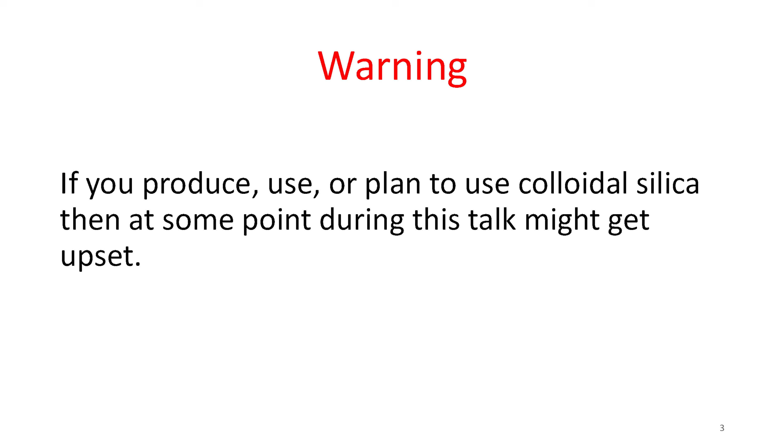And then he says it: 'If you produce, use, or plan to use colloidal silica, then at some point during this talk, you might get upset.' So how is that not a target? That's a target, and I don't like targets.

I know Tyler has a lot of fans, a lot of followers, but at a professional level, this is incorrect to put out there into the market. I have never seen him do this to any other products - I haven't seen him do it to CarbonCure, I hadn't seen him do it to sodium silicates or anything else he studies. Anything but us. But yet, CarbonCure gets hit with nanotubes.

Because E5 has a loud voice, and we're not afraid to throw our stuff out there. That's fine, I'm okay to take a target, but guess what - so you might get upset? Make sure your stuff's right before you start doing this. Because if I find it, and I dig long enough and find something that's not right, I'm going to expose it, and I will expose it very loudly.

This is playing games. We don't need showmanship in concrete. We need solutions because we're hemorrhaging in the world right now, with concrete finishers losing their rear ends because of decisions being made at the high end level. They're losing their butts every day, out there spinning their wheels. This is not a joking matter. When I see documents like this being thrown out there, it's not time to joke around. It's people's livelihood you're messing with. Quit messing with it.

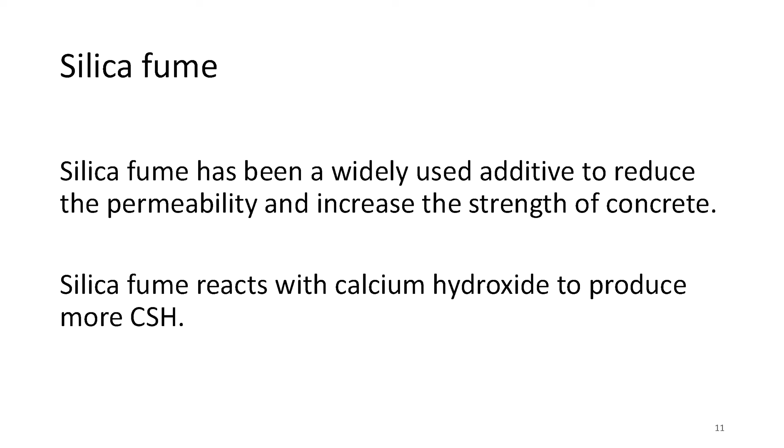Slide 9, he goes, what is colloidal silica? Slide 10, same thing. Then he gets into silica fume. Yes, silica fume has been widely used as an additive for reducing permeability and increasing strength in concrete. We all know this, it's been around forever. It's very problematic, very water thirsty. But he's just setting the tone, and he's right on these slides, it's basic knowledge. Go back to slide 12.

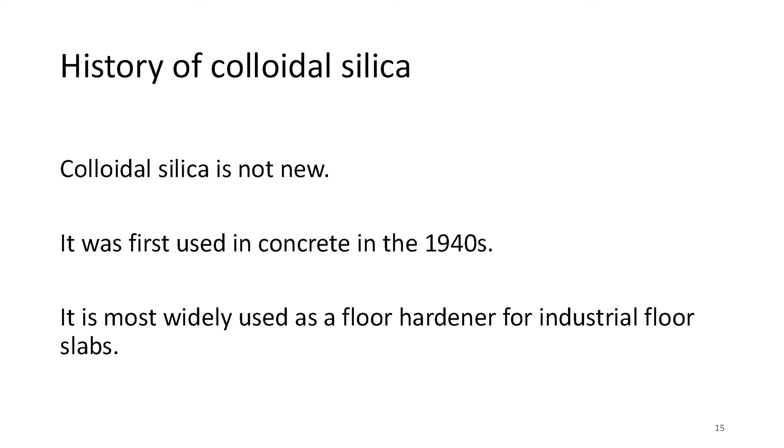From slide 12 down to slide 16, he's right, this is the history of what's going on. But back up, slide 15 though, it's not right. Colloidal silica is not new, but colloidal silica the way E5 is using it is new. Because what they did back in those days did not work very well. We had to modify and do some other manufacturing pieces to get this stuff to work in concrete, to survive the 5 stages of hydration.

In the 40s it wasn't introduced into concrete as a blanket statement, it was more so mortar mixes, back in the 40s, Army Corps paper work. But then you get into the 50s, 60s, 70s, Army Corps of Engineers work. Halliburton started using it in oil fracking, and then they started using it in grout mixes. But we have to ask, why was it being used in oil fracking? Well, because of less cracking in their grout. They figured that out, less shrinkage.

Moisture hydration, yeah. They were doing processes that were very critical when doing oil fracking, so they depended on nanoparticles to get them through some very tough situations. So it's not that it didn't work in the cement grout, it worked. But no one could get it to work through the 5 stages of hydration of concrete, or in a ready-mix truck. That was the challenge, so I get it.

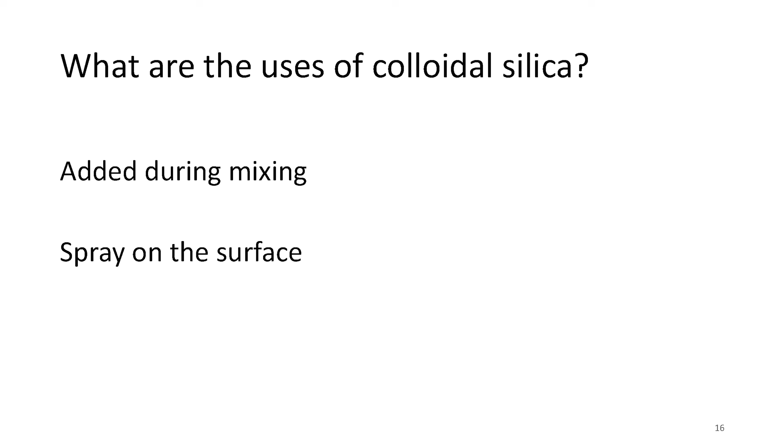Slide 16, what are the uses? He talks about all that, I get all this, it's all rhetorical. He goes, what would you use colloidal silica for? Well, reduce permeability, increase strength and hardness. This is where I stop. I do not preach that it increases strength. It does increase hardness, but it does not increase strength. Strength and hardness are two different things, okay?

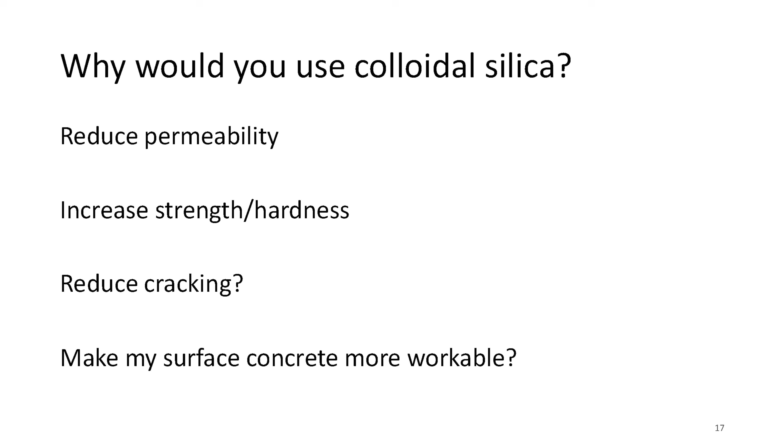Reduce cracking? Make surface concrete more workable? Really, so he's questioning all these things. He's got the right to question. Great, what would you do if this is true? Reduce my curing requirements, reduce cement, extend service life, blah blah blah.

E5 was used in over 300 plus bridges, probably more like 400, just in the state of Indiana alone. And out of those 400, only several have been in question, and a lot of those were 1L overlays anyway that were wet cured, not plastic sheet cured.

Now we can go through the long list of the sprinkle effect, keeping concrete wet, keeping the blankets wet, that happens, X, Y, and Z. But only one piece of the recipe might be strong, while the rest of the recipe might be faulty. That one piece can't make up for the faulty recipe.

Okay, so, but we're an easy target, easy to blame. And that's okay, I'm okay to take that up.

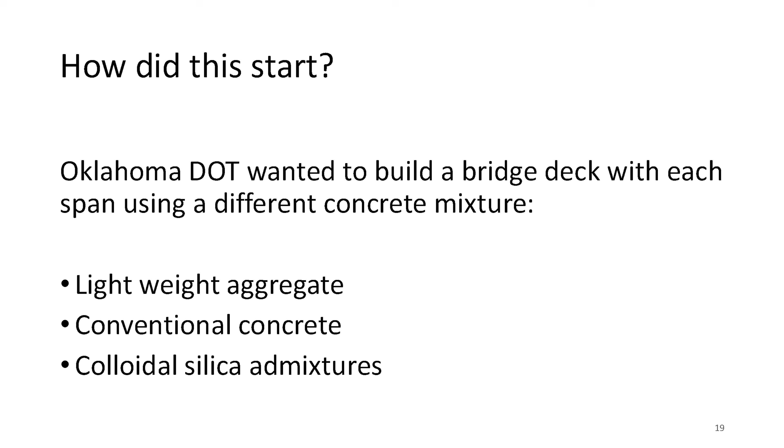So now he talks about, in slide 19, how did it start. Oklahoma DOT wanted to build a bridge deck with each span using lightweight and conventional concrete and colloidal silica admixtures. So as he's going through here, Oklahoma State wanted to develop concrete mixtures and benefit of these materials.

So it's my understanding that the university, Dr. Tyler Ley and the students came up with these mix designs. I've seen the mixed designs, I looked at them. I already knew they were over-chemicalized and not something I would be putting on a bridge. But hey, I'm not the expert. You wanted to do this, you do it, I'll stay out of it.

My job is to make sure on the day of pour, game day, that everybody's doing game day preparation best practices, everything's met, everything's done, best finishing.

So when we get into this, the products are, slide 22, what colloidal silica products were used. He uses A1, A2, B, and C.

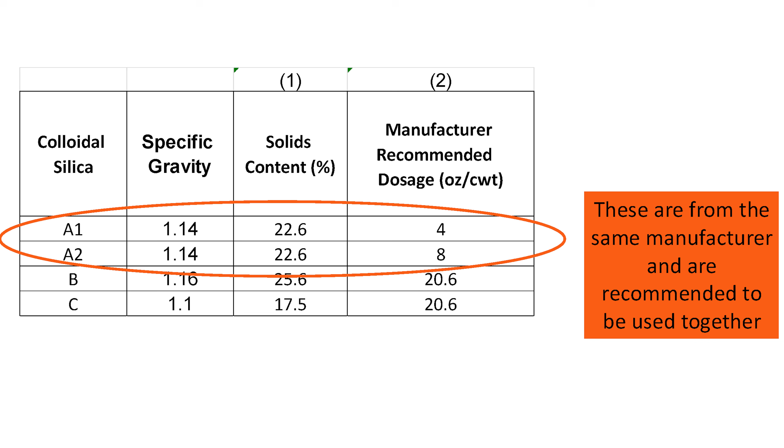One thing about these, the most ingredients, he talks about the most and least active ingredients within this table. I already know that this table's wrong when I look at the solids content. I already know that these solid contents can't be off this much, and that's because most manufacturers run with very strict quality control measures and how close they are in manufacturing. So these are way off according to the C of A's on products delivered.

And when you look at slide number, let's go to slide number 33, just get to the discussion. At the manufacturer's recommended dosage, yes, those were manufacturer recommended dosage of each product. That I do agree with.

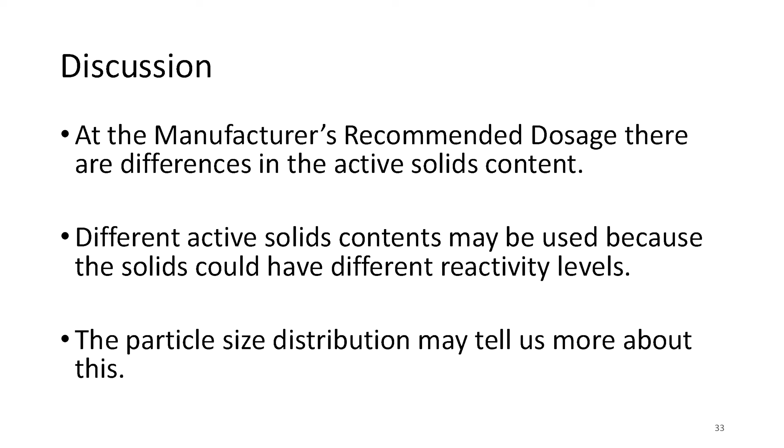The particle size distribution is something that is a very delicate process to use, and you have to use certain tools and equipment to get the actual measurement, because we are measuring particles that are 100,000 times smaller than the circumference of your hair. So I know what it takes to figure these out.

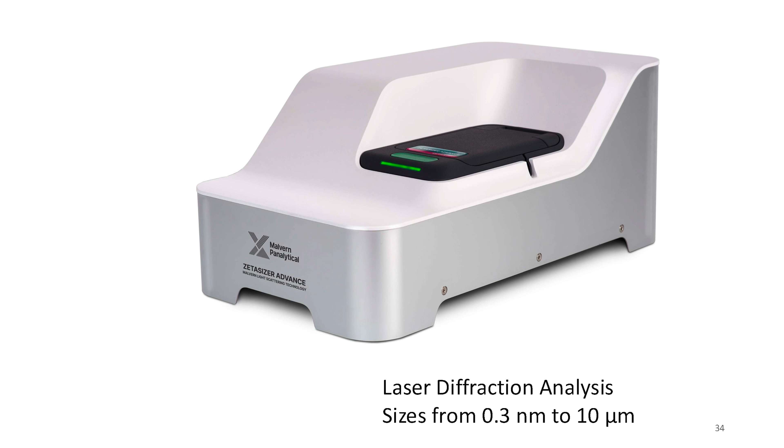So when we go to slide 34, I see the picture of the laser diffraction, and I already know this is wrong. Laser diffraction is not a way to measure nanoparticles to their precise size. What laser diffraction will catch is agglomerations. They'll show chicken necks or turkey necks in between the particles, and then they'll consider that one particle, which we know through federal court cases is not the proper way to measure.

Yeah, we've already been through that, and the courts have already ruled that the best way to do it is the BET method, where you've literally got to dry it, break it down to each particle, and then measure. This is incorrect, so therefore the message in the particle distribution is an inferior way to test the product that is in question throughout this whole presentation and through the bridge deck. Obviously, you know more about this than I, but this machine goes to sub 100 nanometers?

This is just a quick and dirty test a lot of people run, but it's not correct. It doesn't tell you the whole story about what's going on. So when you go to slide 37, I knew it was instantly wrong when I start seeing the D50 nanometer at 50, 125, 267, 37. I know that product A is not 50 nanometers.

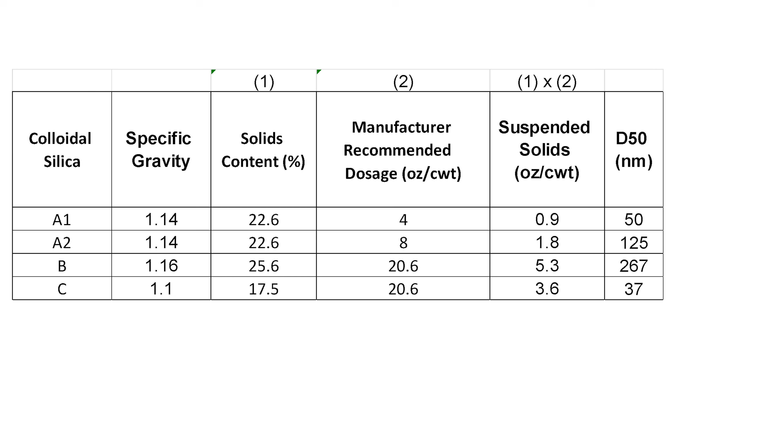I know product A2 is not 125 nanometers. I know product B is not 267. I know product C is not. Even though those aren't mine, I know what they are - it's interesting how I found out. Either way, this is not correct. That information's wrong. It's not even close to silica fume.

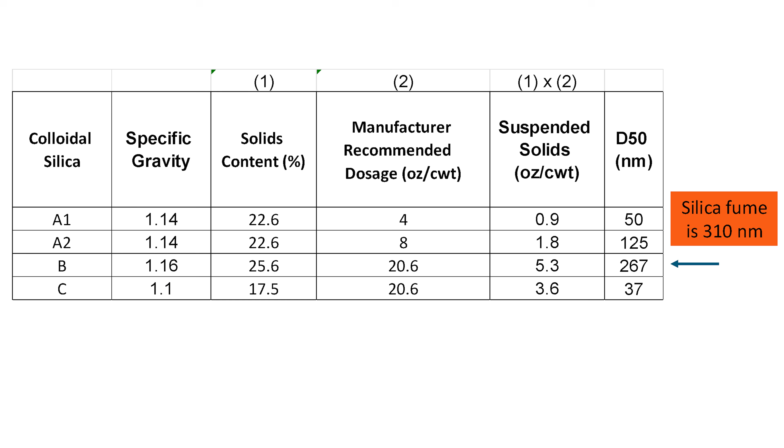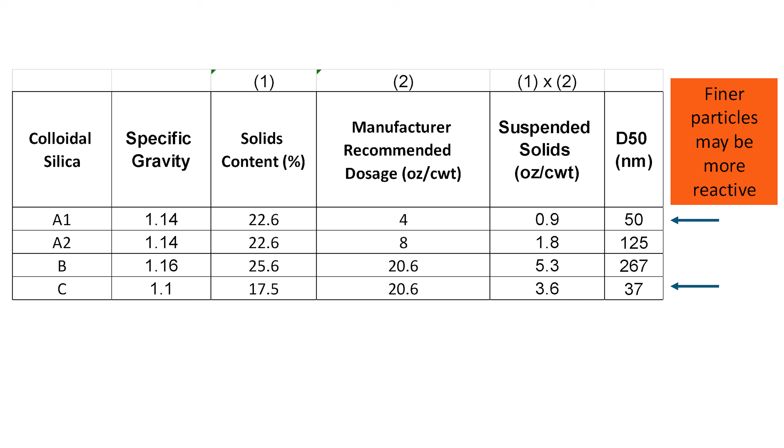On slide 38, and then slide 39, it talks about finer particles may be more reactive. Well, that statement is true, but 50 nanometers is not as reactive as something that is 3 to 9. This is not correct at all. This whole information contradicts his research right off the bat, so it already puts a trust factor for me when I see this.

No, you ain't doing this testing. This is not right. If the fundamental numbers or quality of the product is off, then how can anything following that be accurate? So when you go to slide 42, we talk about the wrong instrument - laser diffraction cannot see a 9 nanometer colloid. You just can't see it, it's too small.

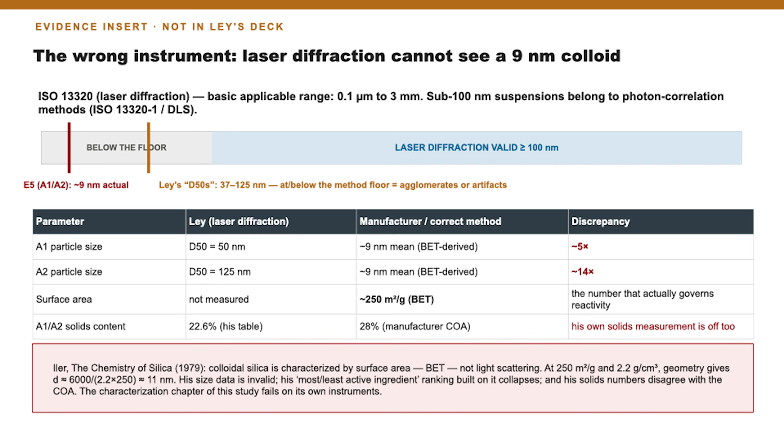Okay, so this graph kind of shows what it was. I know what the manufacturing is. I know what the square footage is. So here they are, I know what it is. So all that information is incorrect.

Now let's get into the bridge mix, the 0.45 water cement ratio. There was no fly ash for this particular pour. This is just a 6.5 sack - pretty general mix, right? Pretty general.

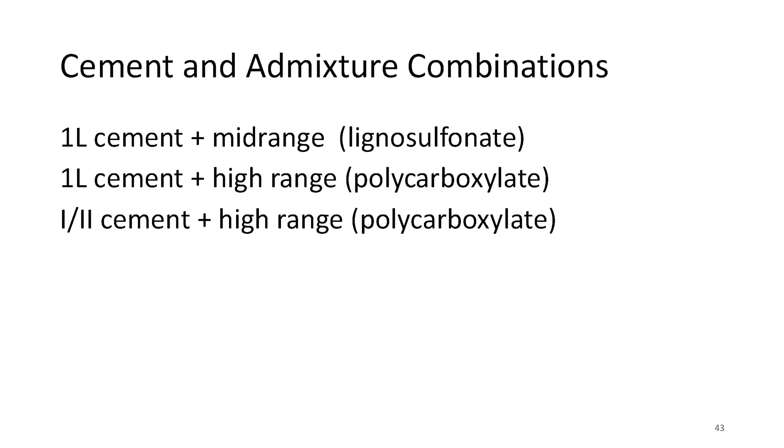And then on slide 41, 3 cements, water reducer systems. So now he's testing all these water, lignin, sulfonates, polys, blah blah, through the testing. He does slump, water cement ratio, compressive strength, resistivity, shrinkage tests, and diffusion of coefficient.

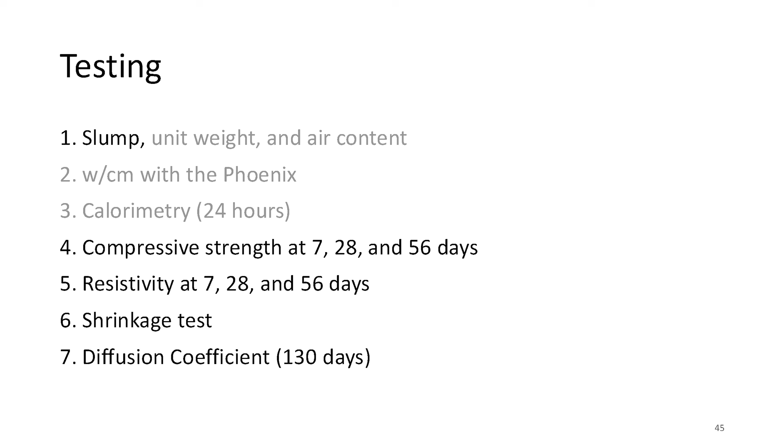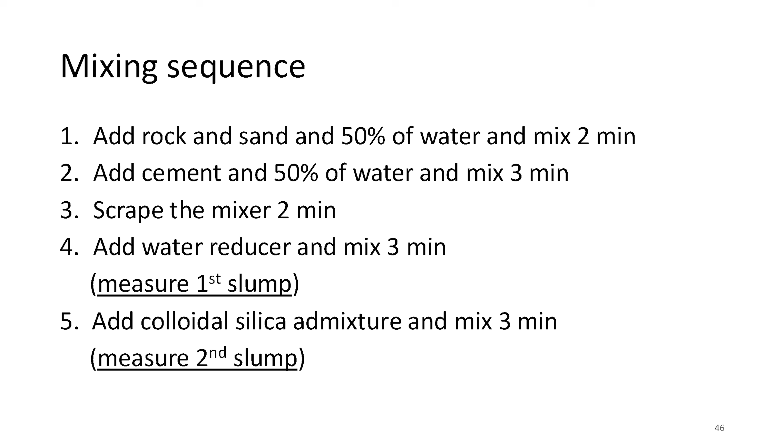That's on slide 45. When you go to slide 46, he starts talking about the mixing sequence - adding rock and sand, 50% of the water, mix 2 minutes, add cement, scrape the mixer, add the water reducer 3 minutes, add the colloidal silica admixture, mix 3 more minutes, measure the second slump. I don't know what dosing process this is, but I can tell you right now, this is not the way to mix colloidal silica in a mix, period.

First of all, you got to get 70, 80% of the water up front. You cannot do 50%. You still got too much dry material - it doesn't have enough surface chemistry on it to wet it out. So therefore something's going to happen, it's not going to perform correctly. I already seen that as like, well, this is wrong.

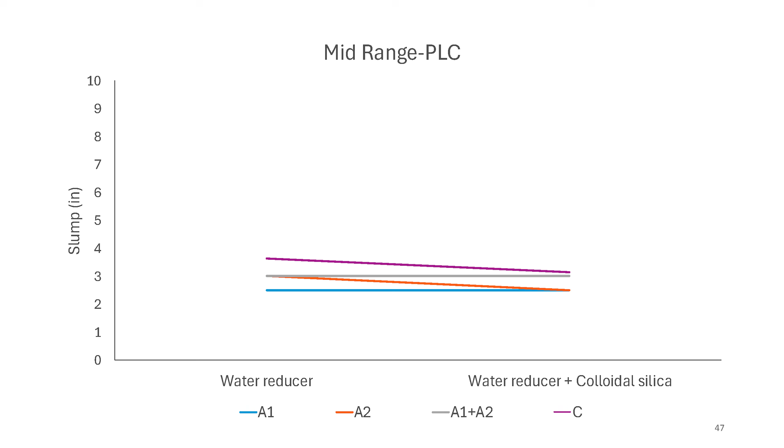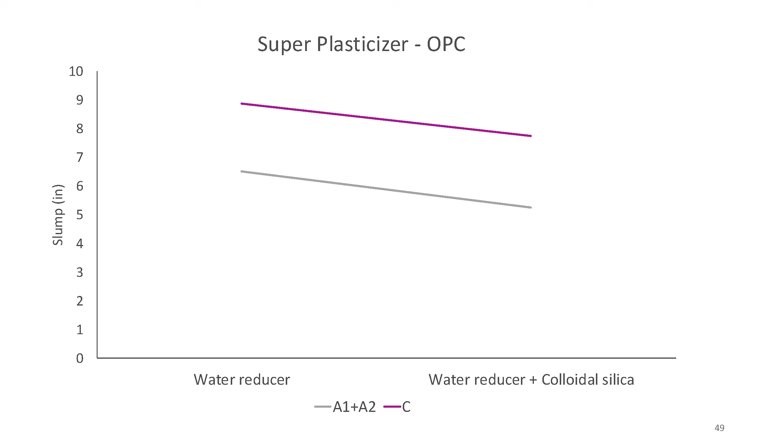Second slump, it is what it is. Slide 48, super plasticizer - all these results he's getting show minimal change in slump. Then the colloid was added, there is significant reduction of slump. Well yeah, there's going to be significant reduction of slump because you didn't put enough water in the front when you're using colloid. See, this goes back to not understanding what the colloidals are doing. You have to have everything wetted out before it goes in, because if it touches anything dry, it's going to pull everything in and make it dry.

But see, we're shooting at the bow on something and spreading this to thousands of people in the public before you even understand what's going on. This is where I have the problem. The reason we're doing this today is because what was presented to the public wasn't all the information - it wasn't in its entirety. We found information that is online currently that wasn't presented, that sheds a great amount of light on what colloidals can do.

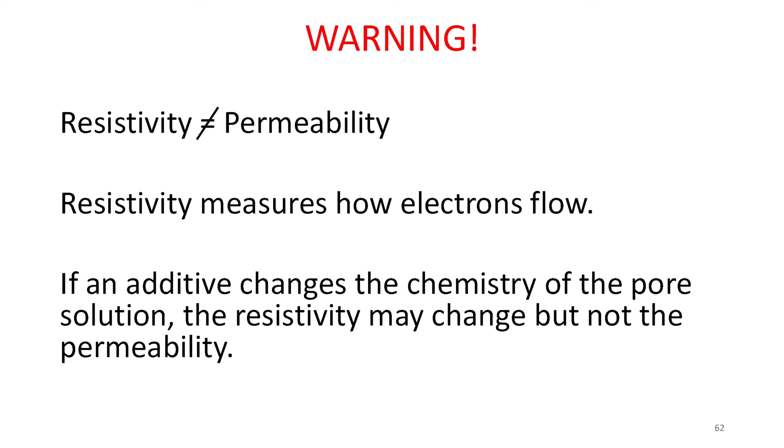Next slide. And then we start talking about the resistivity, pore solution, and X, Y, and Z.

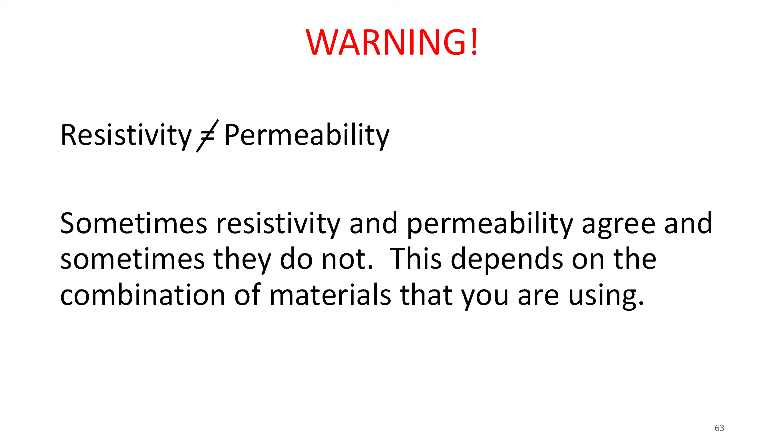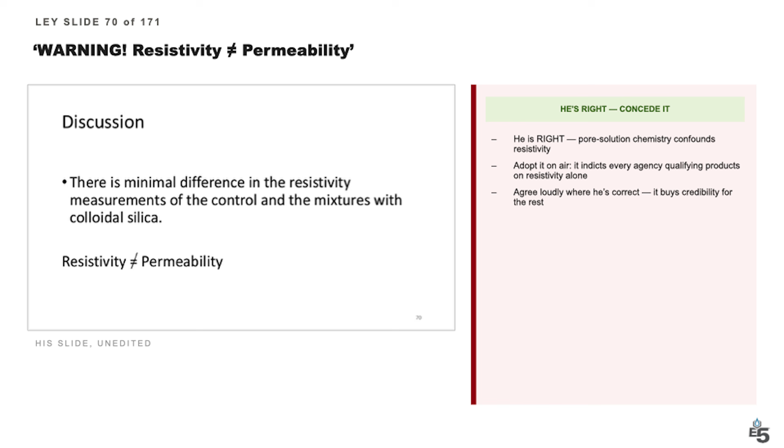Now, permeability, we're all going to have a moment of disagreement. Permeability testing to me is just not a very good test. It's not a reliable test whatsoever when you're trying to prove things out.

So on slide 70 through 73, he's showing what he's using, diffusion coefficient.

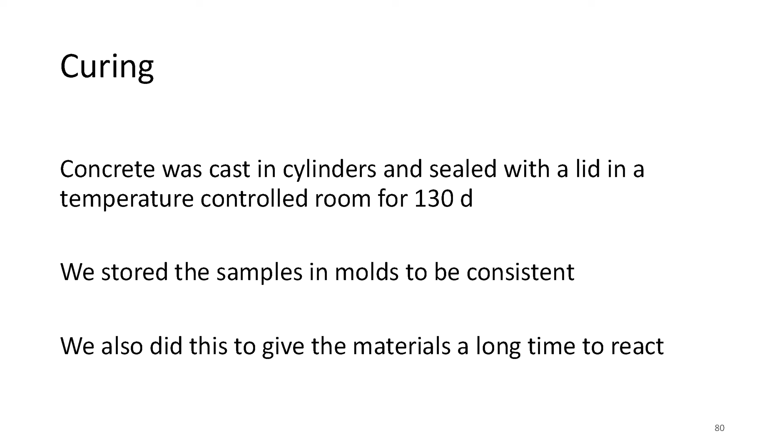And then when we get all the way to slide 80, he talks about curing. Concrete was cast in cylinders and sealed with a lid for 130 days, blah blah blah. Okay, so that's great, doing it by the book as best he can. This is all general information. The lab gave the product perfect curing for 130 days.

We need to think about that. For 130 days, you just let these things sit in water. Does that really happen on a real concrete application? No, absolutely not. So why would we go off that data if it's 130 days? We wouldn't. Why even show it? We wouldn't. I don't understand why you would even show it.

On the flip side of that, you've got a couple different mix designs that you want to have as controlled testing for, so I get that. Let's get this data set, but don't equate it to what's happening in the field.

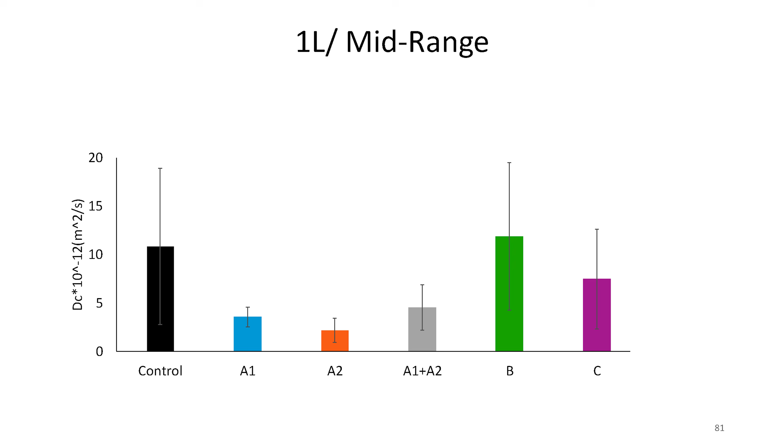So when we get to slide 81, it's very interesting. One of the buried headlines was A1 plus A2, the bridge combination. This is what was used in the bridge, A1, A2. That right there beats the 7-day wet cure control. Cut chloride diffusion well below the control? Yes, but it never was talked about.

It never, why don't we see a warning sign up here? Instead of warning, be like, hey, this stuff is doing something, look at this. Is this an anomaly? Is their claim true? Is it an anomaly?

Marginal, yeah, they're all the same. Any variable could be the effect of that. Could have been the amounts of rocks and sand you had from one cylinder to the next. I don't know.

And these are lab results. Let's keep saying that. And then he did the diffusion with high range, this and that. Now we got to stop and think.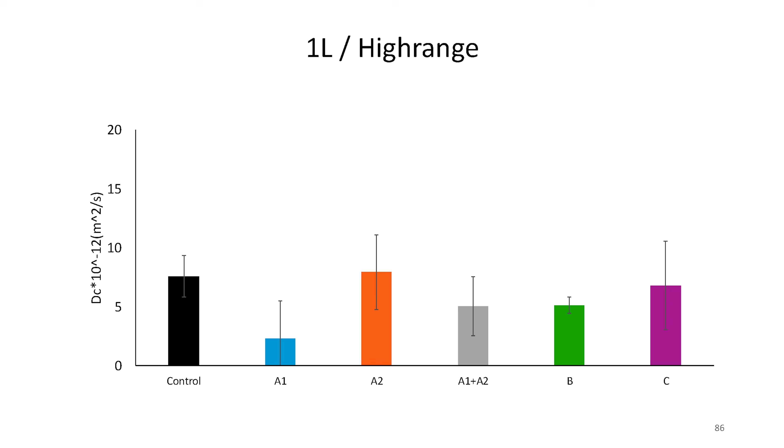Now, these are diffusion tests, and when you start getting into it, you've switched from mid-range to a poly, different chemistries, different surface chemistries. This doesn't mean the colloidal didn't work, it means you changed another variable. If you kept the colloidal the same as cement and you had that with a mid-range, all you changed went from mid to a poly. The poly's the problem, not the colloidal. So don't say it's the colloidal.

It's not. You want the narrative for the people that you eat lunch with, eat dinner, shake hands, and do whatever else you do with. Well, it's skewed. You're trying to pacify them versus saying, hey, this is a valuable solution, or just present the data without any sort of personal gain to it. Correct, just say it how it is.

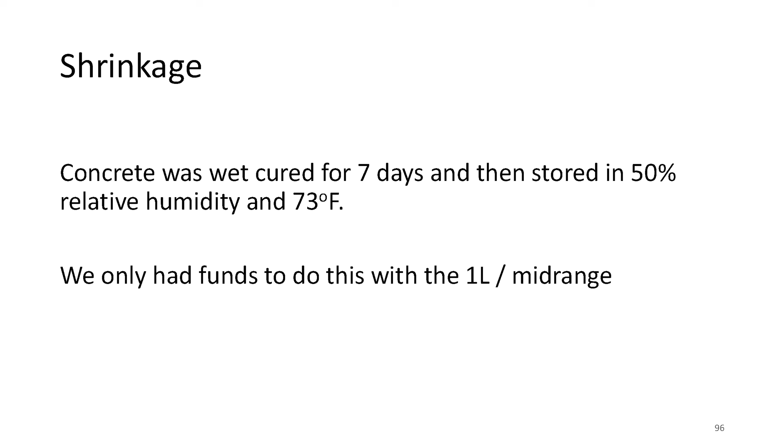So now we're going to get to some of the shrinkage numbers. This is where it gets very interesting. Concrete was wet cured for 7 days, this is on slide 96, and then stored at 50% relative humidity. We only had funds to do this with 1L mid-range.

Okay, so here again, we only got funds to do it with one. If you don't have any more funds to check 2, 3, 4, 5 cements, then my suggestion is I don't understand why this data even became public. Because at the end of the day, you're going to try to sway and influence thousands of people making decisions with a very small, one data point, and yet I'm hearing on the streets all over that I need to get this under control because everybody's making a decision off this one data point.

For instance, I was removed from a DOT because of this presentation. Correct, but this presentation had nothing to do with their materials. That's wrong. You should not be trying to influence people like that with just one data point. That is wrong, and shame on the people that made a decision off one data point.

When the research shapes public policy, there is a responsibility of that researcher to show the mass amount of data points, or say, hey, I've only got this set, so let's not base everything off of this set, but here's just information, let's weigh it, let's get us to the next point. I mean, I've heard it from people, when you talk to certain individuals, that says well, they listen to Dr. Tyler Ley and all of his little short films.

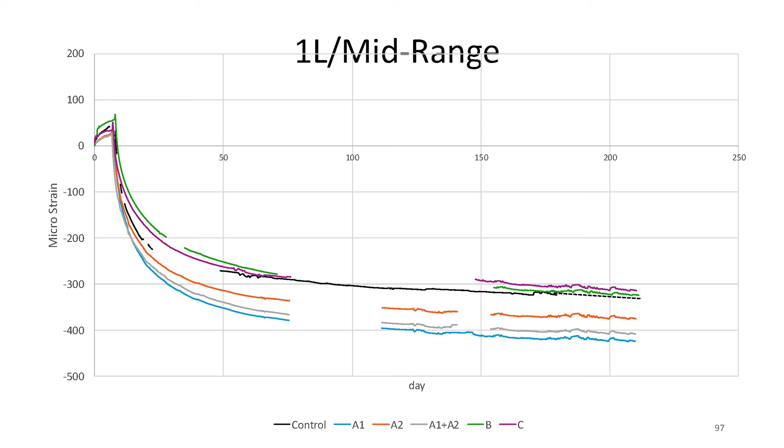But here's what they do. I bought a book one time, and this is interesting, the book caught my eye. The book was called How to Lie with Statistics. But you know who the number one backer of that book was? Bill Gates. Interesting. That's not shocking to anybody. Yeah, he talked about how to use percentages and how to use graphs and make them bigger.

And that's exactly what I seen on the shrinkage data. Oh well, say it's a percentage and it looks like it's bigger than what it actually is. Well, that's influence, shouldn't be that way. When you're talking to this and you're looking at the numbers, they're minimal, but yet we'll scare someone by a big percentage number. That's lying with statistics. It's in the book, you can look that book up, it was the number one bestseller on the New York Times. Oh my, backed by Bill Gates.

So that's what this is, the shrinkage was minimal, scare tactics, versus what, it's influence to keep these people away from colloidal silica. Or just make them question enough. It was stated. And you know what, this is what I love about podcasts and all podcasters in the whole world: we can start putting out there what we want, the things that are hidden.

At the end of the day, it was told in many, many committees that colloidal silica or nanotechnology would never be an admixture in this industry because it does too much, and they don't want the other traditional admixtures to go away. And one of those people is running one of the ASTM standards that took 10 years to get this material into the market. I heard that from a reliable source. Now, I'm sure people are going to say, oh well, that's hearsay.

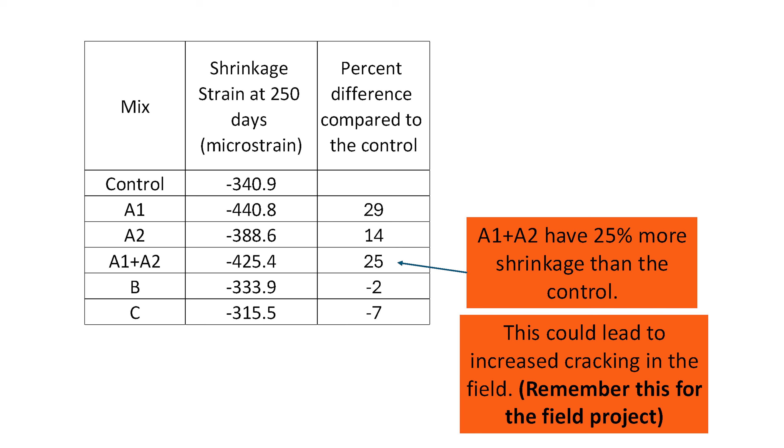But when you get to this, they do lie with statistics. Oh, 25% more - no man, these are little microstrains. It's like saying, hey, I'm 3 nanometers versus 5 nanometers, well I'm 20% bigger. No, dude, we were talking marginal. And the percentage of variability is much bigger than that.

But also we got to go back up to the slide that talks about the mixing. First of all, you didn't mix it right. Adding the water to the mix - 50% of the water attracts the silica, and then it protects, and shrinkage will happen. So you might want to call the experts before you actually start mixing this stuff.

Well, and doesn't the slide talk about scraping the mixer? So obviously they're doing it in a lab mixer. They're doing it in a lab mixer that doesn't have the energy needed, right? We know that. Yeah, I mean, it's been proven - you've got to do it in the mixer that we've got.

And I tell people all the time, this is not hidden. I tell people, I said hey, if you're checking this in the lab, you ain't going to see nothing, period. You got to take it to the field. That's where it works, that's where it happens. The magic is there.

Okay, so the discussion is, on slide 106, A1 and A1 plus A2 showed an increase in shrinkage of the concrete. B and C had minimal impact on the shrinkage. There again, we know why - I've just explained why. Now you can take my word for it or not, and I really don't care if you do or not, but I know how this stuff works because we've been dealing with it for 15 years.

We are the experts in nanotechnology. E5 is, whether anybody wants to like it or not, we are the experts. Right, got the patents to show it.

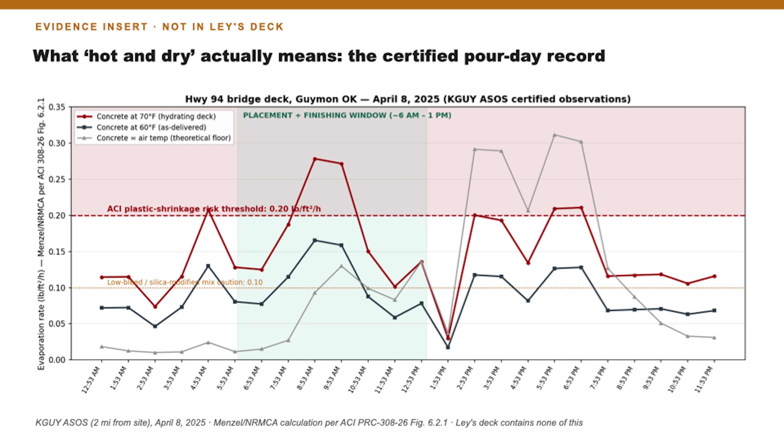So as you can see, about 8:53 to 9:53, there is a spike in evaporation rate - huge, over 0.25, major. And then all of a sudden at 10:53 it plummets down. So it goes up, it goes down, and then it plummets way down about 1:53. So this concrete went through a lot of changes.

So now this information from the National Weather Service was not presented - no, none of this was presented. I presented this because I wanted everybody to know that this is my information of what we recorded. Right, because when you're doing a semi-controlled test pour out in the field and you've got multiple spans that you're conducting, the temperature and timing plays a dramatic role in the performance. It's absolutely huge - you can't have apples to apples if you've got this much of an evaporation swing.

Is what you're saying - right. So then we go into slide 10, I got slide 109, okay. So the bridge construction: span 1 was lightweight, span 2 was control, span 3 was - I'll just call it what it is.

It was us. It was E5, it was A1, us, A2. End of story. But then again, when I seen the span order...

Think about a bridge deck. I'm like, why is control in the middle? It's the easiest part of the whole bridge. There's really no stress on the bridge there, zero. There's a lot of stress on span 1, span 2. And why is that? It's verified by many bridge engineers that have looked at the bridge.

You mean span 1, span 3? Yeah, span 1, span 3 has the stresses on it. And why is that? It's on the end of the embankments and tied in, but this control's just sitting on two piers, and it has room. That right there already concerned me.

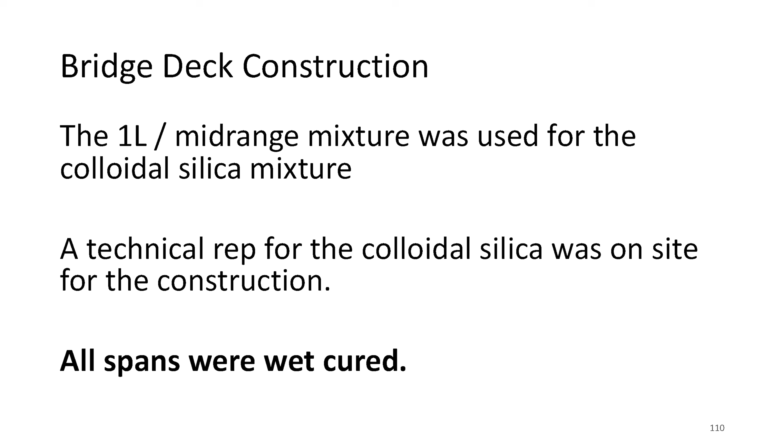So on slide 110, it talks about it. The 1L mid-range mixture was used. So they used the mid-range for the test. A technical rep, that was us, on site, verified. All spans were wet cured. Now hear that, big word, people. All spans were wet cured, same curing method regardless of mix design. We're talking the gold standard of curing. Everybody thinks it's the platinum.

I've heard Tyler talk about, we got to get back to wet curing. Didn't he say pour in the rain too? Yeah, that was some little slight thing he did. Either way, the gold standard, wet cure, this whole bridge deck was wet cured. So we should have data that then is pretty normalized, right? That's correct. Everything should have been given the same cure. We're saying it gave it everything its best chance.

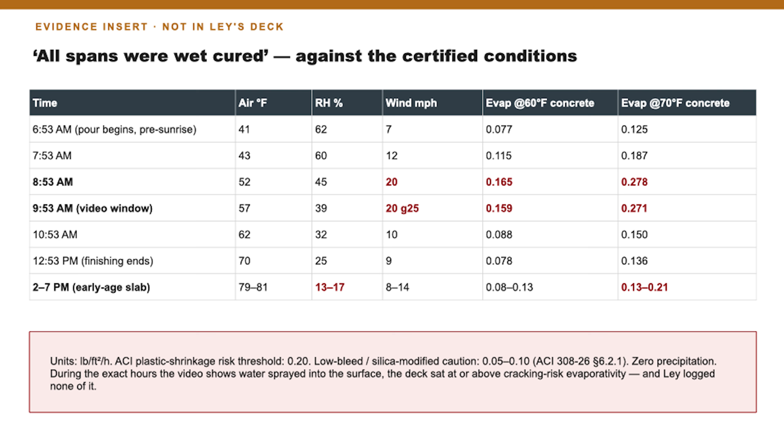So when we get to slide 111, this is the actual time period we started pouring. 6:53, there's the air temperature. These are our records. We're very detailed on what we do and I want to know what my concrete is doing. Now at 8:53 to 9:53, remember that had that huge spike in evaporation. Yep, that's when we actually were taping our videos. Okay, and now I'm going to show you the video. Ben, if you pull the video up, we're going to go ahead and play it. It's about a minute long, but you will notice it's a kind of an interesting day.

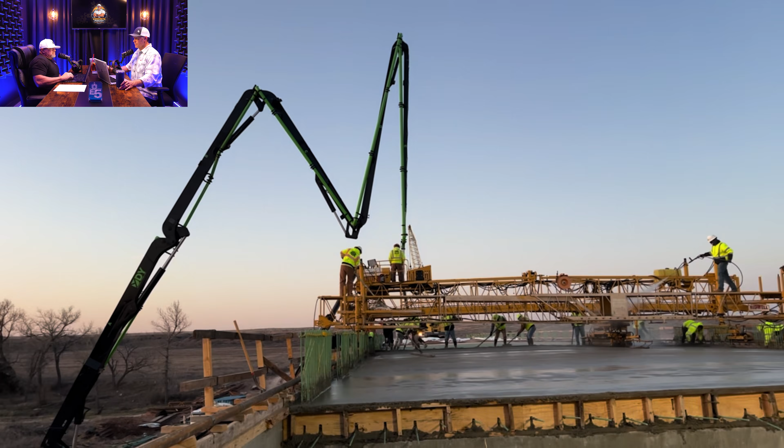It's 9:53, I would turn that off. There we go. So it's 9:53, according to the video. I mean, I know. And according to this is fogging. I don't think that's fogging. I mean, let's put it out to the people.

Okay, ACI 308, let's just quote it verbatim. That is not fogging. You do not spray on top. You let it go up in the air and let it fall down. And then you do not work it into the surface. And what do we see this gentleman doing? Working it into the surface on an E5 bridge deck. That would have been a no-no. Everybody on the crew would have been fired.

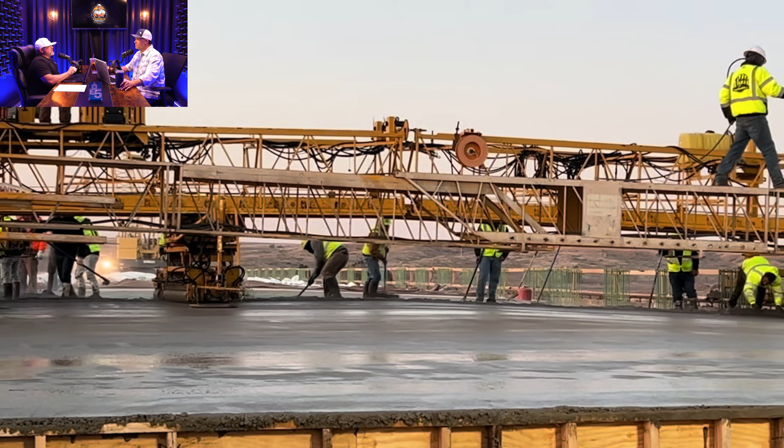Gone today. Why? Because I know what that's going to do. It's going to cause shrinkage cracks at the surface. It's automatic. The water cement ratio at that top middle. I told my guys, don't do anything because you're not in charge of that bridge. You're not in charge of that crew. You just notate it, video it, document it. And I said, hopefully honesty comes out and people will recognize this.

Well, honestly, doesn't seem to pay too high on this data set because none of this was shown or shared at the NC squared in 2025. It was led to believe that E5 cracked more than everything else. Well, here's the video, everything was the same, everything was done properly. Everybody's got to remember, here's the video, it's showing, and I'm telling you why. Because they're putting water on the top, working it in, and you get rapid evaporation and it comes straight down. That dries it up. Guess what you get? ACI 308-26 tells you it will craze, it will crack. Tells you right in the document. And that video, let's explain.

That video is not for wet curing purposes. This was for fogging, this is fireable. That's power washing, this is not right. So that's what went on, and here's all the information.

Well, it'd be interesting too to note, was that technique done on the entire bridge deck, or just certain sections? Well, we're going to get to that evidence, the evaporation evidence that was not shared. We do have that. Okay, so now we're on slide 111.

It talks about the crack survey done by drone 120 days after casting. A drone survey was used for the length and location of cracks. Okay, that's great, we got the cracks. So span 3 had the most cracks. The control had 1 crack.

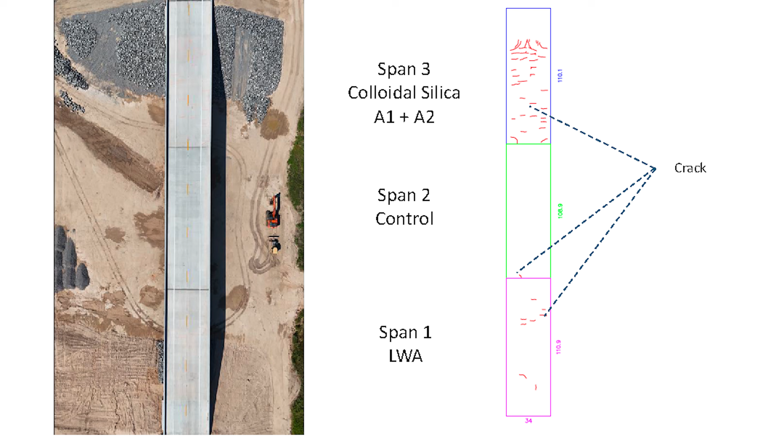So quick question from a guy that doesn't know much, obviously. If control didn't crack, then why are we doing this test? Exactly, why are we doing tests? Why are you wanting to look for something new if your control always performs like this? Seems like a waste of taxpayer dollars and university dollars. You should never even mess with this test if the control was acting so well.

Yeah, you should never mess with it. This control was set up for success. Every engineer I've talked to structurally looked at that and said, well, that's the best spot to put it if you're going to do controls.

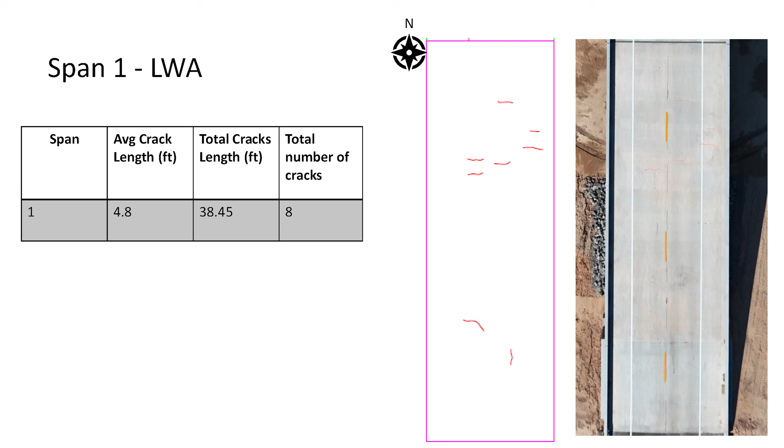So as we go to slide 113, we're looking at the lightweight. It's showing 4.8 length of crack, 38 total, and had a total of 8 cracks. Okay, and then we look at the control, only 1 crack and only 3.9.

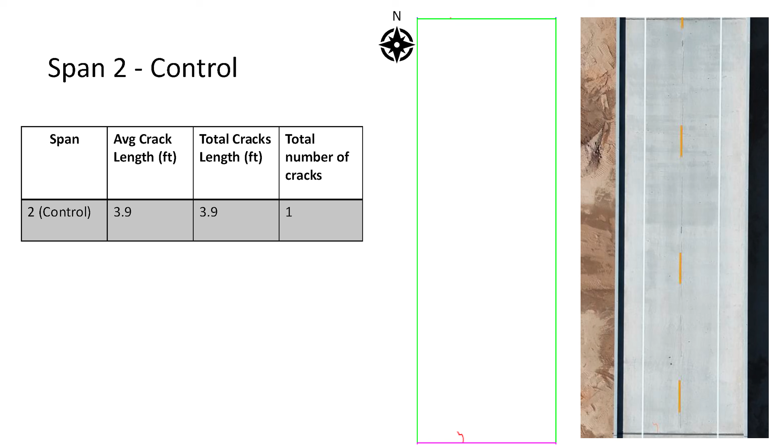I don't believe that for an instant. That's a clean sheet, clean bill of health right there. It's hard for me to believe all that, but that's okay. That's what's reported, and that's what the world believes. And if it does work to that degree, congratulations, Oklahoma State.

Both internal curing spans lost to plain concrete. Lightweight cracked 8 times as much as control. Okay, that's what it says. And then span 3, A1 plus A2, this is where the industry is looking at this and watching this guy present this data and going, it cracked 44 times.

Well, back up to the video. We know why it cracked 44 times, you cannot run from that evidence. You throw too much water on it and the evaporation rate went over 0.25 and slammed back down. You just get a massive moisture rush, moisture drive coming out of that concrete. That's cracks. And if you look at it, the way the cracks are, it's not too far from where they were fogging on that video.

Okay, the video is amazing. It's pretty damning, but no one wants to put that out there. So that's why we're doing a podcast on it, we're going to clear this up. It's just presenting the evidence that we have. You make your own decisions.

So then he kind of goes to the next slide and he goes, these cracks are at the abutment. Okay, maybe, but I'm looking at it, the fogging was completely wrong. Okay, yeah, you're going to get some cracking, but that's a lot of cracking. Okay, so I'm going to say, don't put water on the concrete surface. I don't get it, fogging to me is a legalized way of putting water on the surface. It just shouldn't be done.

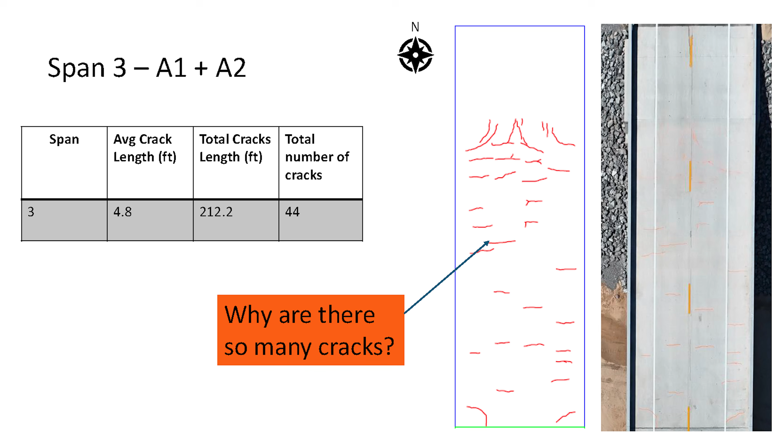Yep, so why are there so many cracks? He goes to slide 118, slide 119. It might be influenced by the shrinkage. So there he's already accusing, mixing lab data with field data, but never mentioned. Right, here's where he should have been pulling the video up or some documentation saying, hey, it's really not, might be the shrinkage, it could have been the application, finishing techniques. But why didn't he disclose that? Right, well, did he not know? Oh, hold that thought, because I'm going to prove to you he did know.

You heard me. I'm going to prove that he did know that video practices were done. He just didn't have the video. Stay tuned, I'm going to show you that one.

So then we go to slide 119, and we talk about the layout, the trial. Control got protected center span - this is not in his presentation, this is from my own information, talking to engineers and gathering research, kind of dissecting the information. So it says it right there: the control was protected center span.

Okay, it only cracked one time. You got span 3, which was E5. It had 44 cracks - it was in the abutment restraint plus the approach of the slab. Okay, same thing for lightweight. Both of them went through.

Question is, did lightweight get treated exactly like E5? Did they put so much water on there? No, because the weather was different when they poured that. Pouring early in the morning, look at the weather, it's different. Way different, so again, you got to be careful.

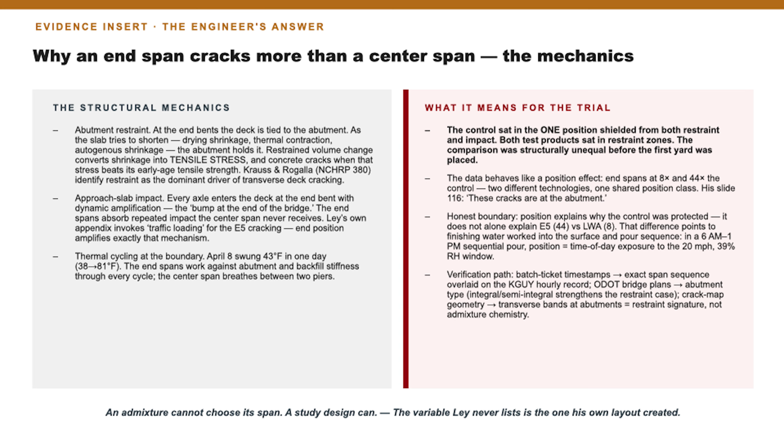Slide 120: why does an end span crack more than a center span? It's the mechanics - abutment restraint at the end bents, and the deck is tied to the abutment. As the slab tries to shorten - drying shrinkage, thermal contractions, autogenous shrinkage, all that stuff plays a factor in that shrinkage. Control just sat in the middle and had no restraint, only restrained by the curing. That's it - lightweight and the E5.

So you guys can download this information, it's going to be for you guys to look at. Have all you want, I love sharing information and data - post it. Because at the end of the day, knowledge is power, and people need to know this.

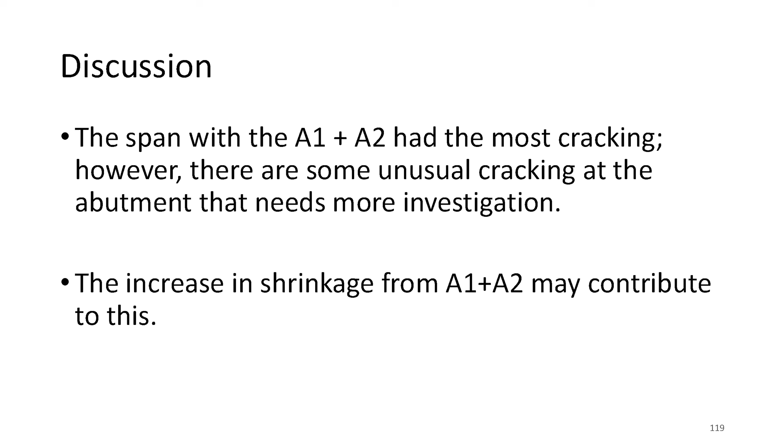So the discussion: the span with A1 plus A2 had the most cracks. However, there are some unusual cracking at the abutment that needs more investigation. Gee, do you think? You already had the information, you just didn't want to disclose it at the time you presented this, and I'm going to show you how I know that. The increase in shrinkage from A1+A2 may be contributed to this.

To what? It doesn't say. It just says ongoing work - we have taken cores and are measuring permeability of the concrete, and it says we are still analyzing the data from the field. Okay, well, don't know what you're analyzing, but it is what it is.

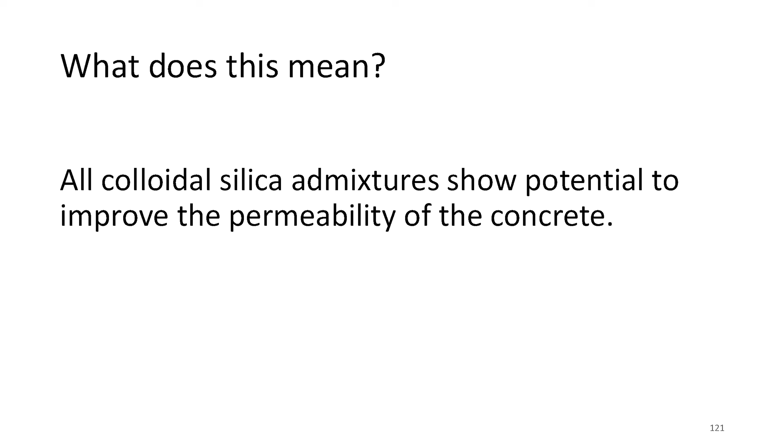So on slide 121, what does this mean? All colloidal silica admixtures show potential to improve the permeability of concrete. Show potential - well, there's way more data than you took. So what you need to do is not make statements like that.

You need to make statements that are true and factual. Just because your data didn't show it doesn't mean people like Nebraska's is not true, Indiana's is not true, other people's that's doing this is not true. You need to specify this is true for your geographical area.

And as a researcher, don't formulate conclusions. We've worked with enough valid researchers in this industry, amazing people that test and report - there's no conclusion. Now, we get upset with them a lot of times, right, because what's the summary of this? Can't you provide a summary? Can't you provide a conclusion? And their response is no.

Here's the data, you interpret it, right? That's what this should have been. Here's the data, let us interpret it. Don't say warning, don't say shows potential - you're coming to conclusions, yes you're putting it out as a psychological method. I mean, it's not rocket science. Show the data, we don't need your opinion.

So when you go to slide 122: some colloidal silicas caused an increase in concrete shrinkage. Okay, well, I'm telling you right now, that's one test only - it does not increase shrinkage, it either controls it or gets better, depending on the cement. But at the end of the day, shrinkage tests are done with mortar bars.

They're not done with the actual concrete in the lab. Okay, so at the end of the day, if you didn't do this with the aggregate, you have no idea - you can't make that claim. Where's the report of the shrinkage bars?

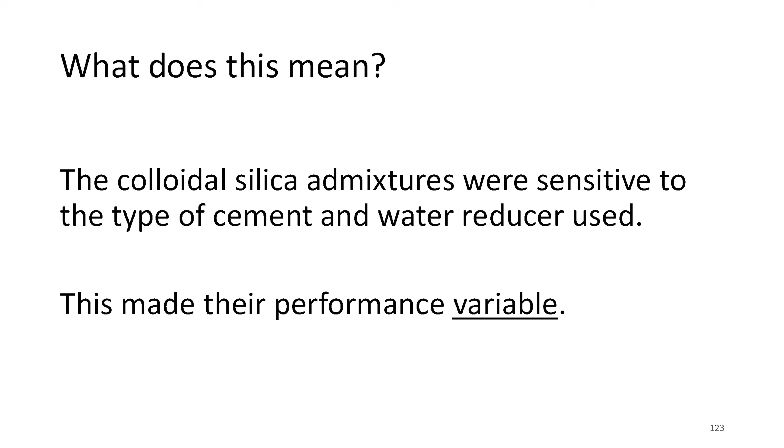This made their performance variable. No, concrete's variable all the time. You cannot say that this one thing made their performance variable.

The statement that I heard in the room that made a lot of people aggravated, from a believer in technologies like Nano, was 'your enemy is the unexpected change.' That really upset a lot of people. Well, when you make statements like that, what is the unexpected change?

So he says permeability is a critical parameter in concrete. Is it, or is that just you saying that? Listen, we're going to talk about permeability for a minute. I mean, granted, it is a critical parameter. But permeability doesn't mean nothing if it cracks.

Agreed, but we do want less permeable substrates. Do we? Well, yeah, we don't want things soaking in. We don't want brines and salts and water in. If that's the case, with these permeability tests and the results they're shooting for, we should never have an issue with a bridge deck, but we do.

Agreed, but we're not saying that. We're saying it is a critical parameter in concrete. Whether they test right or not is a different conversation. Yeah, I still don't think it's as critical as the other, which is durability and abrasion. I'm not ranking which one's number one, I'm just saying it is one of the test parameters.

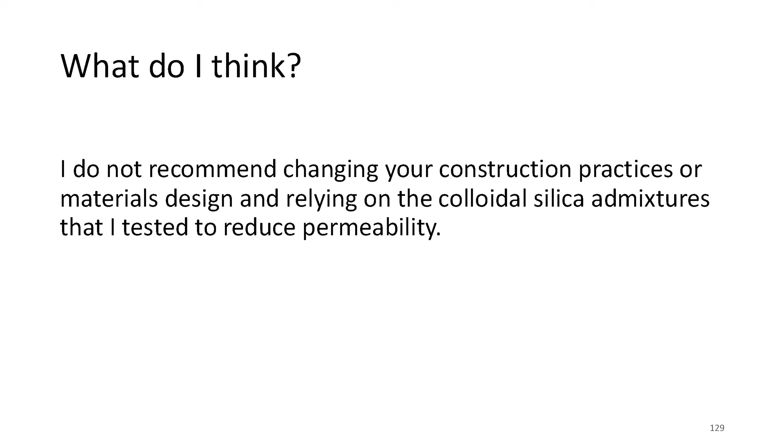Or the devil. Then on slide 129 he goes, 'I would not change my curing practices.' No, you probably won't, but I will show you why I would with his own data. 'I do not recommend changing your construction practices or materials design and relying on the colloidal silica admixtures that I tested to reduce permeability.' Again, why is a researcher directing what the country is doing?

Exactly, present your data and be done. Don't make these accusations when you just did one test and didn't even do it right, because you're not a nano expert. And was he out on the bridge deck? No, he was not out on the bridge deck. He has no idea, wasn't even at the plant when it was mixed.

So at the end of the day, he's making a statement based on his own opinion, and he should state that this is his opinion. 'This is my opinion, but at the end of the day I do not recommend changing.' If you're not an expert in anything and don't know it, then don't say it.

Because it's about ready to change for him in a few more slides. I would not change my curing practices because of colloidal silica. I would not increase my water cement ratio because of colloidal silica. I would not decrease SCM dosage because of colloidal silica.

What a great presentation. So at the end of the day, this is his own opinion off his own data set of his own local materials. First of all, his mix design sucked. Whoever designed that mix design, you just designed an actual mix problem. When you add 2-3 water reducers in a mix, I don't have a whole lot of respect for that, because that's just chemical dosing to hit a number, and you're not taking care of the people in the field, and they're having to do bad practices like that video showed just to get the mix done. So whoever trained you on mix design, I would probably go get a refund.

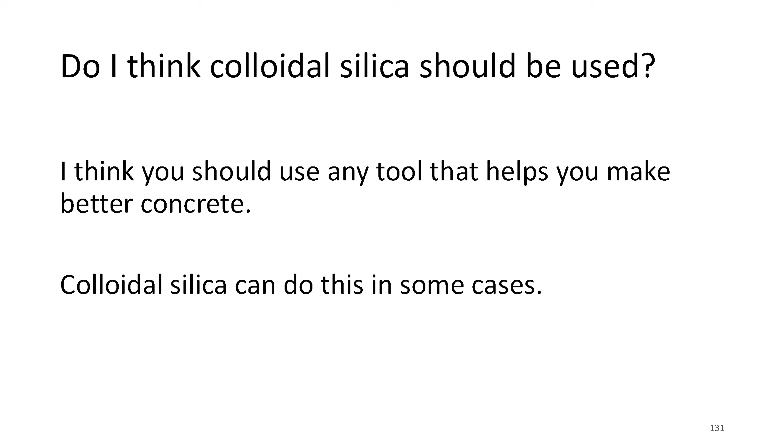Okay, if you back up to the other slide, it says, I would not. Then he says, well, colloidal silica can do this in some cases. It contradicts itself, bro. So slide 132, trial batch, this and that.

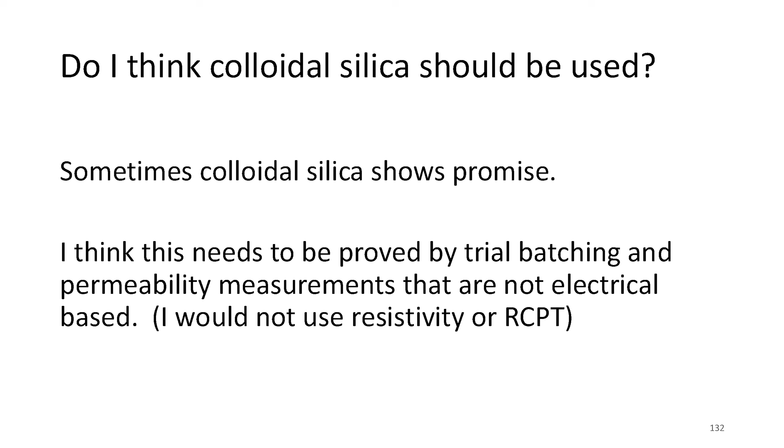So we go to 133, but my data shows product X, Y, and Z is great. Well, what's X, Y, and Z? I don't know what that was. This is possible. I don't think we understand how colloidal silica interacts with other cements, water reducers, SCMs. You should trial batch and test.

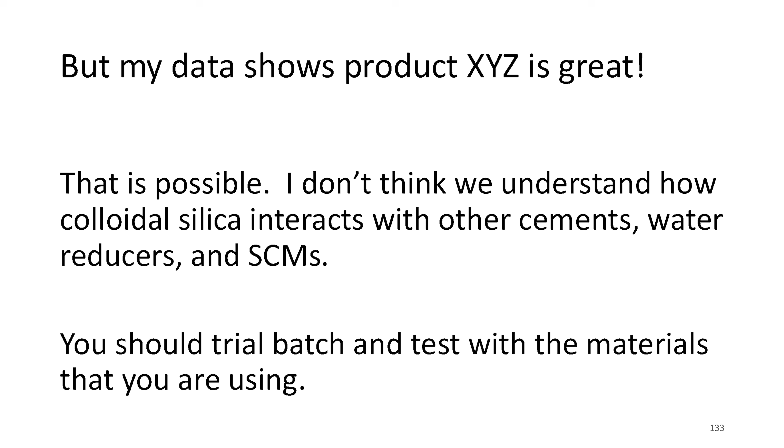Okay, so when you're making a statement that you don't understand how colloidal silica interacts with other cements, then why are you putting data to the public prematurely before you even understand them? I know why. Because you have friends in high places that want this information out to be damning towards colloidal silica technology, so that they don't make any more advancements in the industry because of, I should say, threat of other products going to the wayside that they can't control.

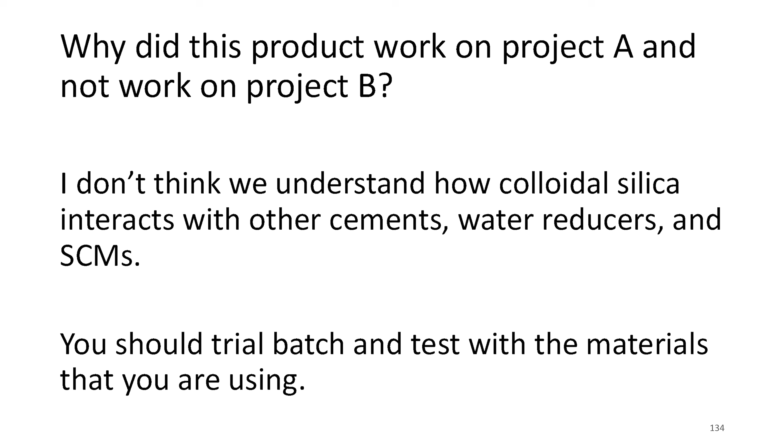Now, slide 134. Why did this product work on Project A and not work on Project B? I don't think we understand how colloidal silica - so it's a repeat. Slide 135, he does the same slide again. Setting the emotions up for the next slide.

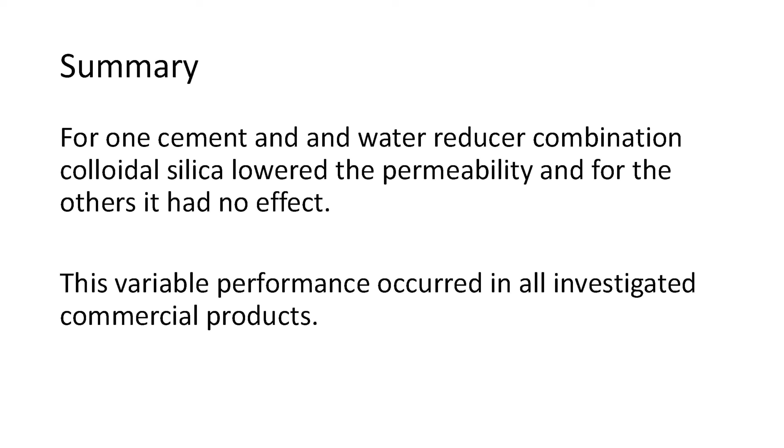For one cement and water reducer combination, colloidal silica lowered the permeability, but then it says for others it had no effect. Well, maybe that's the water reducers, because I've done a lot of testing on water reducers - it's kind of all over the board. This is a very confusing presentation.

And this should never have been put out as a presentation. Shame on you, Tyler, for putting it out there. Right, it should not have been done. He is a PhD. No, I don't care if he's - I'm just saying, I'm going to pile higher and deeper.

He is a PhD, so as somebody with high intellect, I would think you would want to be very clear on your information and your presentation. If I'm a lawyer trying a case, I'd be looking at the evidence going, what was the motive? Why did you prematurely put this out? Why didn't you have a conversation with somebody before you did, because not only is he representing himself, but he's representing the university, he's representing Federal Highway, DOT, he represents ACI - there's a lot of industry players he represents. And all the big industry players set him on a pedestal.

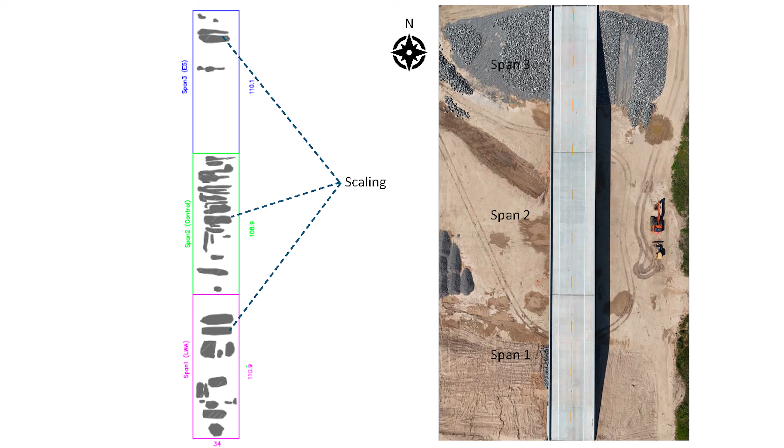140, we're at the lightweight aggregate. It had a scaling of 23.65%. This is the lightweight aggregate. Hold on, scaling, we didn't talk about that in the presentation. No, we didn't talk about that. There's cracking, lots of cracking, but we didn't talk about scaling.

But this deck scaled 23.65% of the deck with lightweight aggregates and wet cure. The gold standard had a scaling problem. Like a mind-blowing, holy cow thing for us. Ben? You mean we had a deck scale 23% and we even wet cured it? In what amount of time, Joe?

That's the part that's missing. We don't have the evidence, and I'm assuming by what we have when this was uploaded to the internet, it was about 5 to 6 months, because it was poured in April. The presentation was in September. So May, June, July, August, it was 5 months at most. But hear it, wet cure, everything scaled 23.65%. This is amazing that the gold standard failed by the concrete freak that designed all this.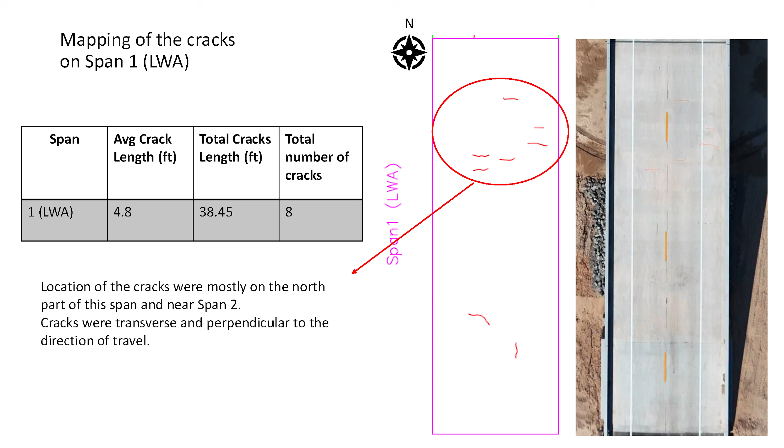So it says nearly a quarter of the lightweight span surface scaled. Now we're looking at slide 149, that's into the cracks again. And then we got a picture of slide 150 where he's measuring the cracks.

And then we see the actual scaling marked on page 151. We have 891 square feet of scaling out of 3,700 square feet. Roughly 23%, 24%, yep.

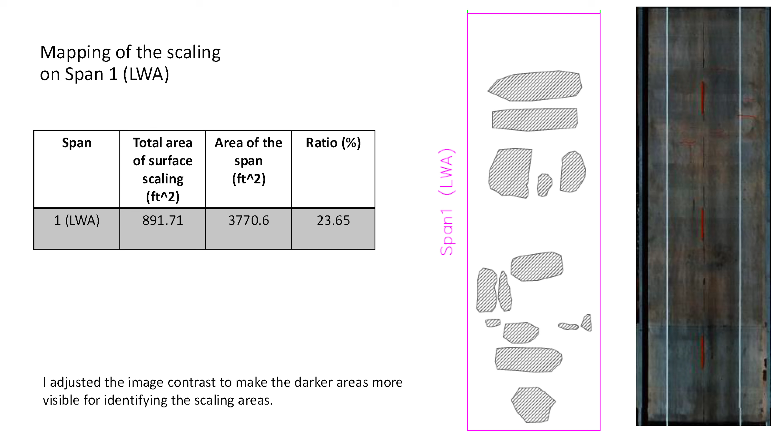Okay, first of all, it's the gold standard of internal curing, and yet we scaled 23.65%. What's that tell you? More than likely, the fogging wasn't done on that portion. Don't know, can't answer that. So nearly a quarter of the lightweight scaled. The conventional internal curing had the worst surface durability of the entire bridge.

This is the lightweight? Now there's pictures of it. Oh my, this would have been helpful to show in the full presentation.

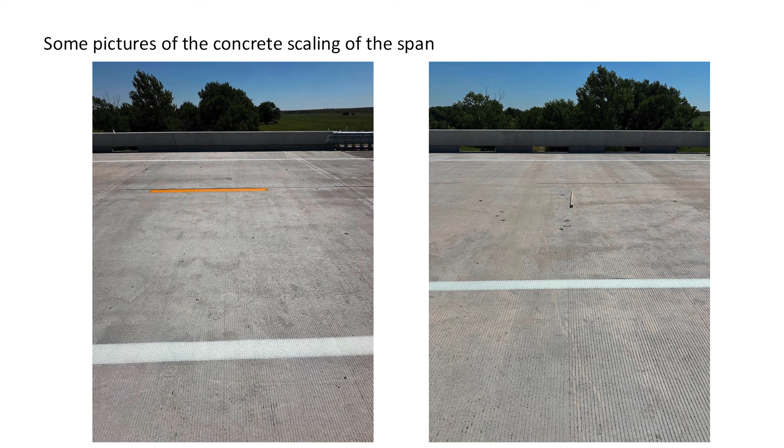Now let's look at the control. Slide 153, scaling 22.45%, 23, and only had one crack.

So we put the lightweight on wet cure. We put the control on wet cure. We put the control in the middle to control the stresses. Any good engineer would know that and set it up for passing. But now we put the test panel that we want to debunk at the end, at the middle of the day, right, when evaporation is high, wind is high, and sun is high.

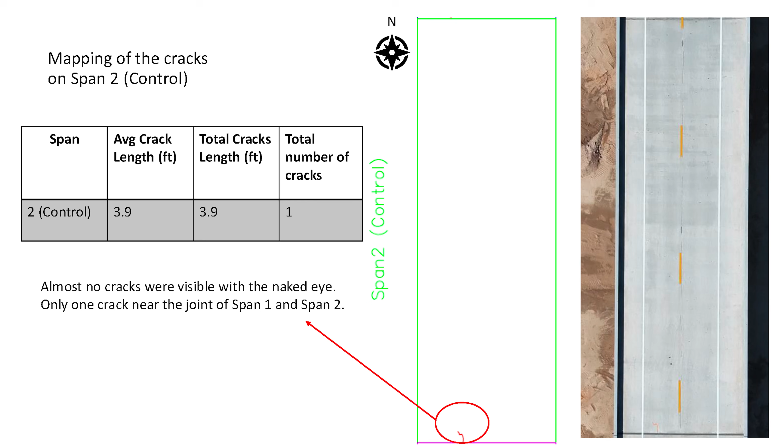So one crack, oh great, that's awesome. But the surface is scaling. Congratulations, you got one crack, but your surface is gone. And look at that picture. Oh dude, that picture's bad. But no one showed this during the presentation.

Why wasn't this shown during the MC squared meeting, in its entirety? Why? That's all we're asking for. We don't care if our stuff didn't work, or why it wasn't shown. It just needs to all be shown.

So then we go to the control. We see the crack, and then there's the scaling. 831 square foot out of the 3702, again another 23%. Holy cow, wet cured and scaled, and holy cow, all the gold standards, all the ACI documents, it says this is what we should be doing.

It's because type 1L does not handle wet cure. Period. It's that saturation of the surface. It's too much water too early.

So at the end of the day, now I'm not even going down the other. Don't go down that hole. Leave it alone, leave it. Okay, I'll wait till I get more factual evidence to put that one to bed too. Correct. So, control, more pictures.

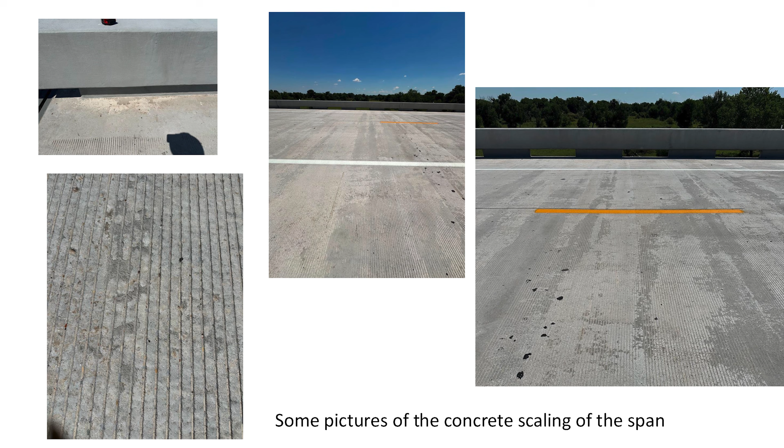So we're still at 23? Let's look at that, them pictures are nasty. It's slide 157, yeah, that's scaling. It ain't even been through a winter yet. I mean, what DOT would want to see that in 6 months?

This would have been great to have, great to show everybody in that room and been honest. Because it fundamentally says we have a problem. And it's not just this admixture or this lightweight or this control. We have a fundamental problem here. I wonder what that problem could be.

Well, I'm thankful for this because what he proved is proved what we've been saying. Wet cure is an issue. It's not curing or solving our issues. It's not solving, it's a Band-Aid. And this is just proving why. But is it a holy Band-Aid?

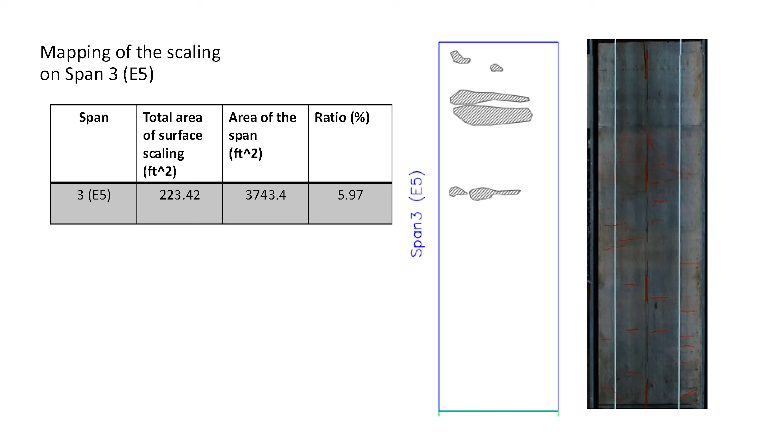Let's go to slide 158. E5, we did not put this together. No, you download this right off the site. 5.97%. We had 75% less scaling than lightweight aggregates and control, noted by the guy, noted by Tyler himself.

It's his presentation, but wasn't presented. Didn't think it was valid or valuable information. Telling you that the wet cure doesn't mean nothing, because it scaled on the control, but E5 made the difference. That's what this showed. Now why wouldn't he have showed that? Well, because then that would validate what we're doing. It's positive information, and that would have been influential on a lot of people.

And that would have negated the use of the devil picture. Well, and he really wanted to use that. So then we start looking at this and we see the cracks. Yeah, it had a lot of cracks. We already know why it had a lot of cracks.

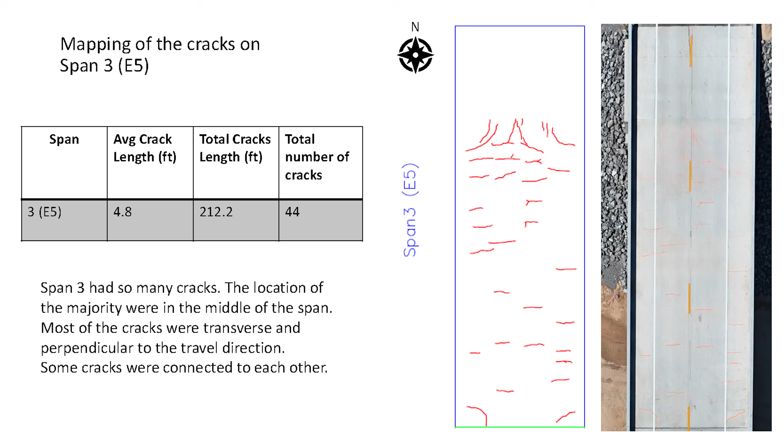It had a lot of cracks because they were putting water on the surface, working it in, the evaporation rate, which is all factual data backed up by the airport on the weather. But then this is interesting. On slide 160, no cracks were detected on the north portion of span 3, which is supported by the pile. Cracking was mostly observed at the adjacent section, validating where they were fogging the most. We had none after, but we have cracking where they were fogging.

Hello? How much more evidence do you need? Let's just call it power washing from here on. Yeah, okay.

It states that E5 showed improved concrete surface texture. The most important thing we're trying to do in concrete is preserve the surface and the durability. The rest of this can be fixed by practices.

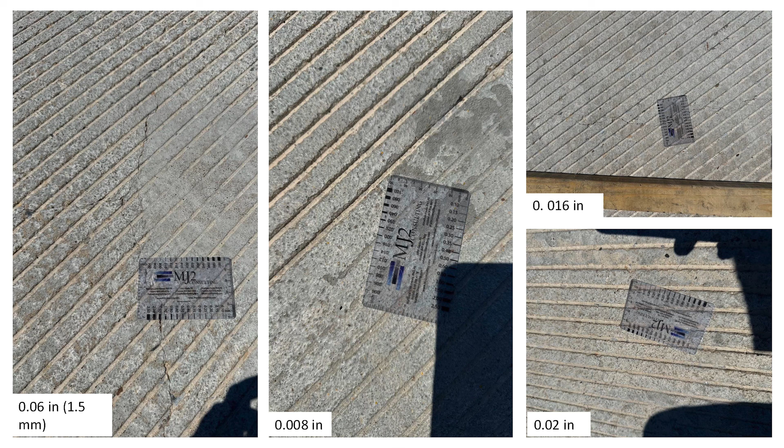Now here's some cracking, showing the measurements of the crack. I could not locate these cracks on the map. These are all the pictures I took from some of the cracks. Okay, that's cool, that's awesome.

Why would he say, and this is noted in slide 162, 'I could not locate these cracks on the map'? I think it's something when they were flying the drone, but then again, I'm not quite sure what that means. I don't either. But then there's the surface.

Because the industry's scared of us. Well, that's the conspiracy theory. But why are you scared? Because of change. It's really about what you lose.

But aren't we all kind of fighting scaling and delamination in today's cements? I just showed you what I did to it, took it over control by 75%. I did better. It wasn't the wet cure that did it, it was E5. But this information was not allowed to be put into the public so they could see it presented from an unbiased perspective.

He gave a presentation that made other people go the other way and cost E5 damage. That should be apologized for. I agree. So here's some more pictures, blah, blah, blah.

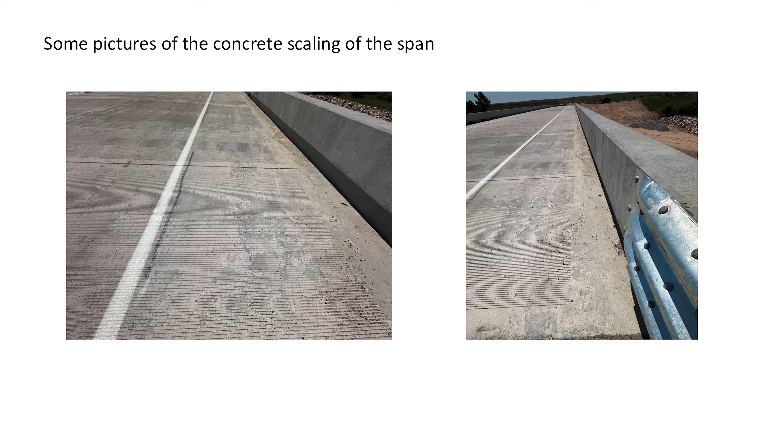So this is amazing, here's his actual conclusion. Span 3 had the most cracks, 165. Yep, slide 1, E5 had the most cracks, while Span 1 had only a few. Lightweight internal curing might have reduced the shrinkage and thus the cracking.

I am not sure why E5 had a lot of cracking, but spraying water -- wait, what's it say? Yeah, here we go, this is his own words. It's his own words backing up my video, but he never said it in the main presentation to the public.

Now, when did he see the video? He hasn't till now. You never sent him the video? Nope. Okay, so he knew about the spraying water because someone told him. Slide or point number 3.

Because he says it right there: a lot of cracking, but spraying water after pouring, over-finishing, poor curing. So now he's admitting that the wet cure is poor curing. Wasn't that the gold standard?

Well, it's the gold standard to him, but he's saying now poor curing. How can you have poor curing when you already use wet cure? There's no other curing -- it might be the reason for the surface cracks. Why wasn't that information presented at the NC squared?

I think we all can come to a conclusion. Yeah, I think we all see the pattern with this. So there's not a lot, but I applaud him for putting this information into a slide deck at some point.

Now, based on, let's call it, he didn't have enough time -- whatever, they didn't give him enough time, so he cut it down. And what does a presenter do? Well, I've got to cut out some of these slides. Well, what should I cut out? Here's what we'll do, we'll let the listeners determine what this is.

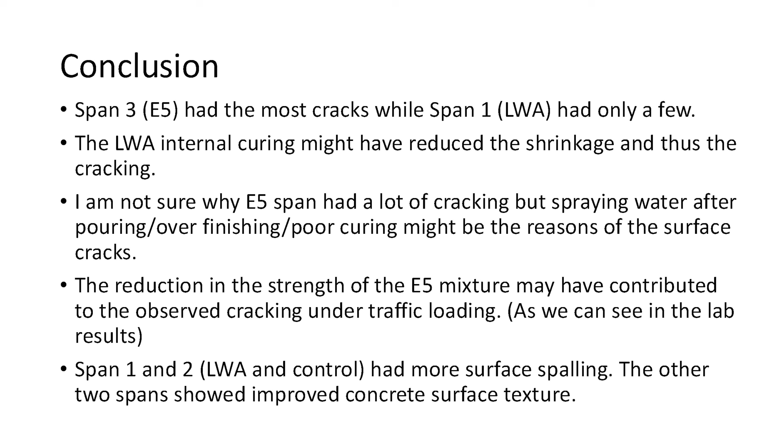The other two spans -- I don't know what that means. I don't know what other two spans. So he basically calls out lightweight and control having more surface spalling. Then, well, there's only 3 spans.

Yeah, so what's the other two? Span 1 and 2 had more surface spalling. Oh yeah, I agree with that. Then span 3, but it says the other 2 spans showed improved concrete surface texture. Yeah, that doesn't make any sense. But at the end of the day, why didn't he go ahead and present this data and say, look, 1 and 2 scaled the most? No matter if they didn't crack, but they scaled, so your surface is crap. What are you going to do without your surface? This slide says it all.

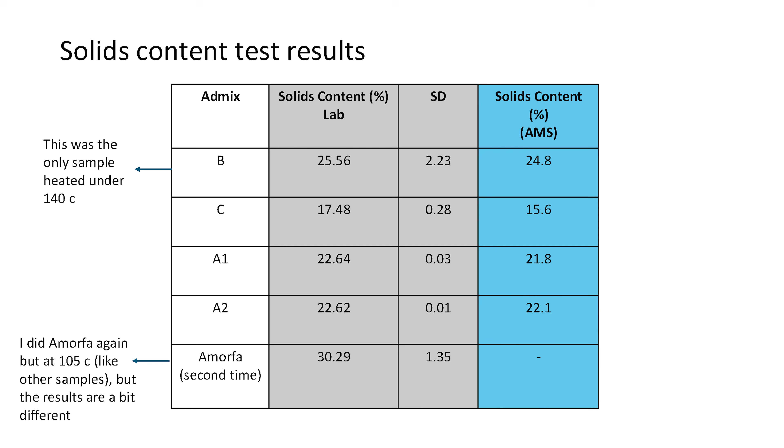And then you get down to slide 168, and then we get down to the brass tacks of who the other chemical companies were that they tested. And by the way, when I look at them, they're already infringing against our IP, so that's a different discussion. There's that, we can go on. And then, of course, there's the slides of the this or that, and then talks about his samples. And then slide 171, appendix solids retest micro sampling cores. So, and then the end of it.

So this is really disappointing after I received this, after I downloaded this presentation off of the actual internet. You didn't know what you had. Didn't know what I had. Right after the conference, I'm disappointed because my gut feeling was right when I first had a conversation with him. I just didn't have it. I didn't have anything to prove it.

I just knew it. And I don't know, call it a blessing in disguise, but at the end of the day, everybody listening to this should rethink how concrete is being manipulated from big corporate. Research dollars are being spent to influence.

Well, and to shape a narrative, right? It's like we're gonna, hey, this ain't no different than the COVID narrative, man. That's exactly what this is. Or EVs are the boogeyman, or the IL cement narrative, where you can go on and on about all the electric car narrative. I mean, how many narratives have we been sold a bill of goods on, and then you find out a decade later that, oh well, that information wasn't shared with us. Well, that would have been helpful to know. Well, absolutely. So at the end of the day,